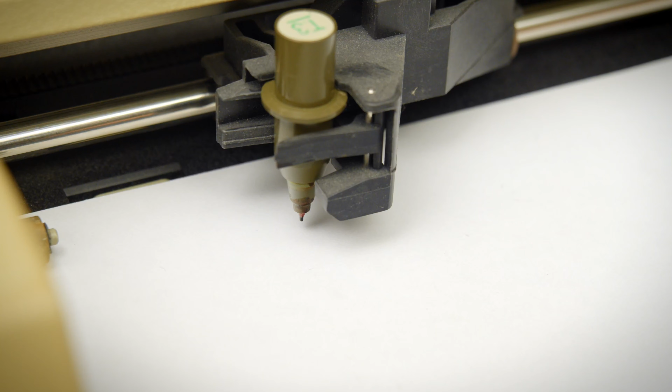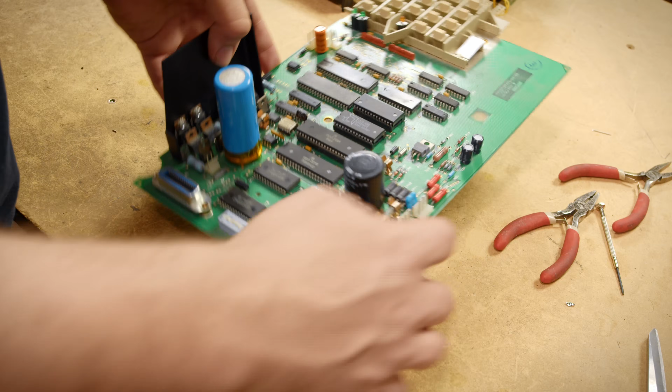The HP 7475A plotter. This is a pen plotter. It takes vector data from a computer and draws it onto a sheet of paper. The 7475 brought nothing new to the market when it was released, but what it did bring made it such a dominant force in its segment that it was the gold standard up until the end, and somewhat still now. Today, we're going to take a look at the history and impact, restoration, and the usage of the plotter that set the course for its industry, much like how the Epson MX80 and IBM PC also did.

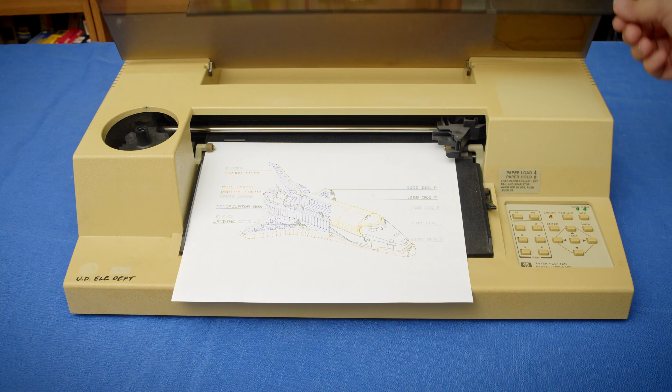There really wasn't any one novel feature of the 7475A that made it so good. Its biggest selling point was holding 6 pens instead of 4, but there were plotters before it that could hold 8. Speed was always an improving metric, but it wasn't any faster than HP's own models released 6 years before it. The same can be said for its resolution as well, which was limited by its control language rather than its mechanical capabilities. But that language was actually one of the biggest aspects that made it have such a huge impact. This plotter uses HPGL, the simply named Hewlett-Packard graphics language.

HPGL was first shipped with the HP 9872 in 1977. Here I have the 7221 sister product, which was nearly mechanically identical but did not use HPGL. But this is actually an interesting comparison. I've been struggling to find understandable documentation on how to program for this plotter due to its compact BCD interface protocol. HPGL, on the other hand, uses ASCII command lines with simple 2-letter statements to communicate. It's nearly instantly obvious how to use the plotter when looking at these commands.

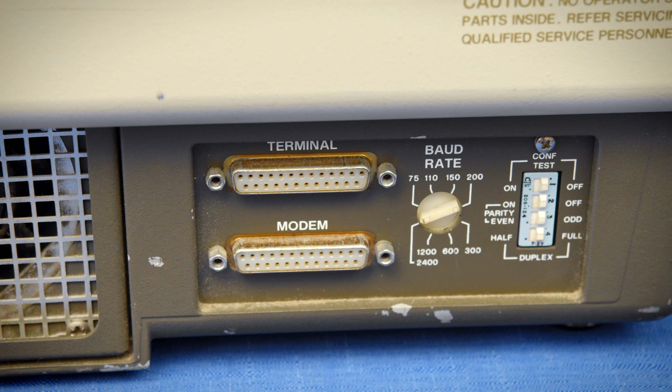However, the 9872 plotter was relegated to usage with mostly HP computers because it used an HPIB interface. The 7221 here is the serial model, but without HPGL support, due to wanting to avoid the verbosity of plain ASCII commands over a potentially expensive time-shared mainframe connection.

This was one of the things addressed by the HP 7470 in 1982, a plotter I've already taken a look at in its own video. It was available with HPGL and a serial model was made. HP was directly going after the IBM PC market with this plotter, trying to appeal to a broader audience. This was coupled with HP aggressively pushing software developers to add support for HPGL to their products. As you could surmise based on the name, there was no universal plotter interface standard, and each manufacturer was creating their own graphics interface protocols.

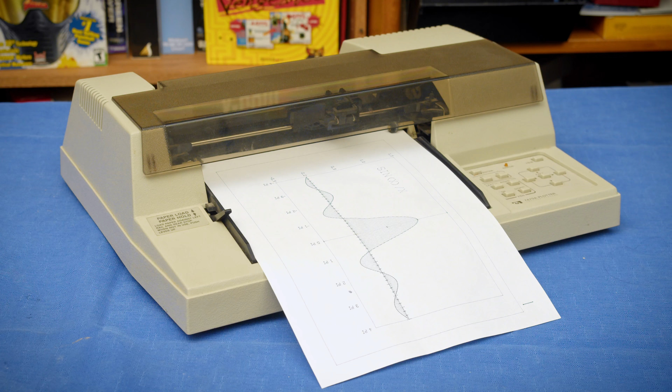The 7470 brought more than just a language gaining manufacturer support though. It simplified the design of the hardware significantly and made it much easier to use. Stationary electrostatic beds like on the previous plotter were replaced with a single pen axis and rollers that grip the paper to move it in the other. This reduced the overall size and weight of the machine due to much simpler mechanics.

The 7470 was only a 2-pen plotter, though it was half the cost of the previous 4-pen $4,200 plotter, coming in at $1,795 at introduction, and this would drop quickly. But for plotters, more pens is always better.

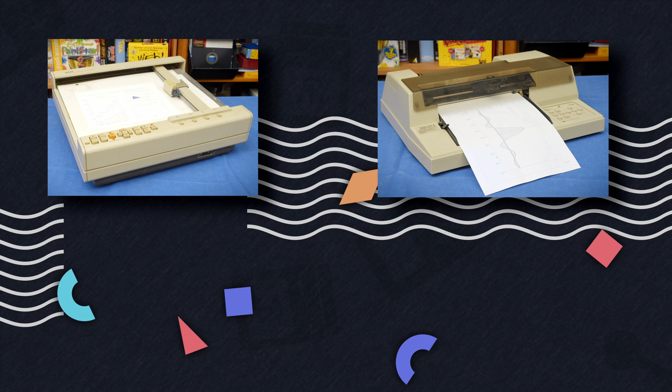Finally, the HP 7475 enters the scene in 1983. It brings with it the now well-supported HPGL interface of the 9872, the simpler mechanics of the 7470A, and adds a 6-pen carousel to bring it up to par with the bigger of its rivals. It also added support for both A and B-sized pages by rotating the bed layout and extending one of the rollers inwards more.

All this for $1,895, with the 7470 also being discounted permanently to $1,095. The 7475 was reviewed well at launch, but it didn't have much to stand out with and was just perceived as an all-around solid device.

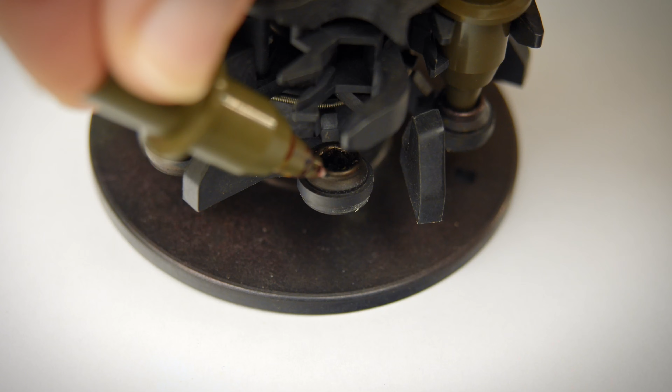One feature of all 3 HP models reviewers still enjoyed was the plotter's design to seal the tips of pens when being stored in the plotter to prevent them from drying out. Elsewise, you would have to remove all of them after every session just to put their caps back on.

The 7475A sold well and was never actually replaced with another model. The 7470 was eventually replaced by the Color Pro, which gave it 8 pens, but did not add wide format paper support. This meant new software continued supporting the 7475 for years, and this is where it gets really interesting, because manufacturers of other plotters decided to take advantage of this and started providing HP emulation with their models, allowing them to use software with HPGL support for the 7475.

Even non-vector devices like this AST laser printer would support HPGL, which as a raster device would have to handle it completely differently.

HPGL became the de facto standard plotter interface protocol, and many implementations were specifically aimed at the 7475 since it brought so many common features together in one place. This support even continues today. Inkscape and KiCad are just two examples of programs that can still natively output HPGL as plain text files to be sent to plotters.

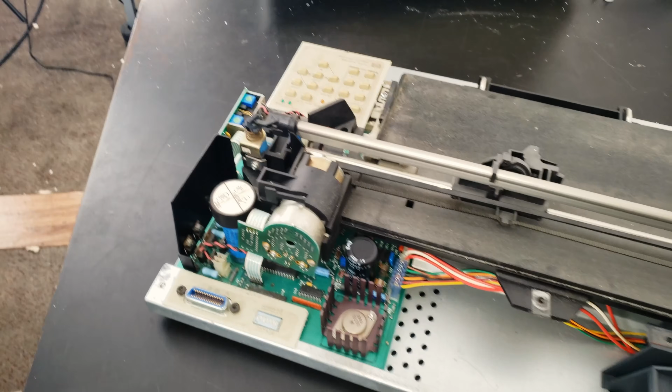This makes using it today still entirely possible with modern computers. But, being 40 years old, you're nearly guaranteed to run into some issues. I was sent my 7475 plotter in a big lot of HP hardware from James in Indiana. Being unfamiliar with the device, I decided it would be prudent to open it up before powering on to inspect, and I'm quite glad I did. The very large power filter cap in it was leaking badly. Thankfully, it had not corroded anything though.

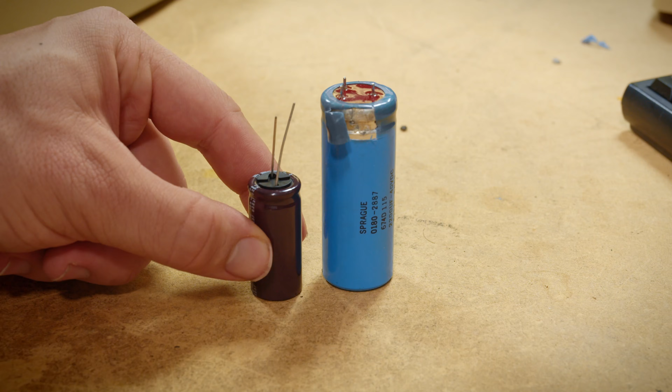Oddly, after I removed it, I found it had been seeping back up the jacket and crystallizing, which was a new failure mode to me. This cap obviously needed replaced, so I went ahead and spec'd out a near full cap replacement set on CapsWiki. I decided not to replace the small axial ones because they looked fine and new ones were outrageously expensive.

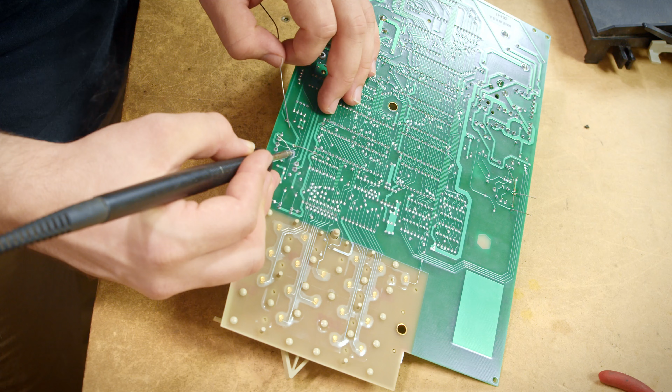The recap was mostly typical, except for the fact that the giant leaking cap technically doubled as a mechanical support. It has a socket with foam padding on top that supports the pen rail piece. It may not have been needed, but I thought this would be a fun time to try restuffing a capacitor with a smaller modern one. It was not easy, and I almost tore the case apart, but I was able to do it.

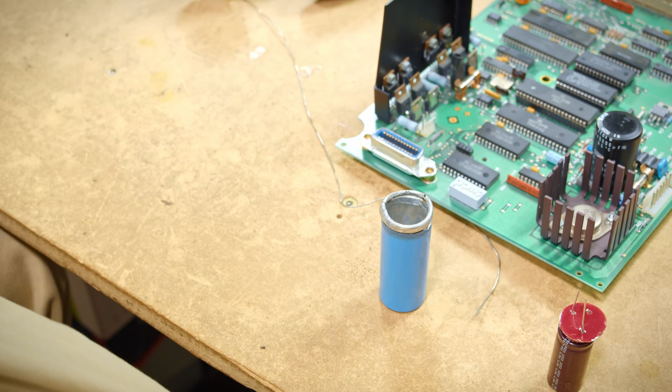I got it back into place in the end. Again, this probably isn't needed, but I was trying to keep it as stock as I could and didn't know how removing it would affect it. After I knew it wouldn't catch fire, I was free to turn it on for the first time and was pleased to have it work flawlessly.

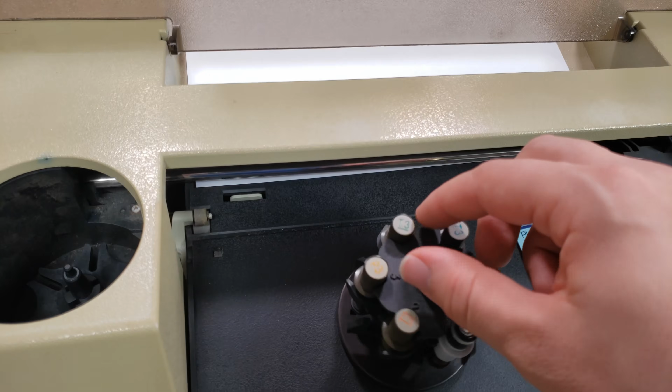I was alarmed by the brutish method it uses to find the first pen in the carousel, which is done by slamming a peg up against a stop and checking the motor current, but it was working. Now that it was known to function, I started working on some better demonstration software on my new favorite HP system. But when I got to the point of testing it, that peg had sheared off of the pen selector gear. It turns out it's a softer plastic part, which makes this even less surprising.

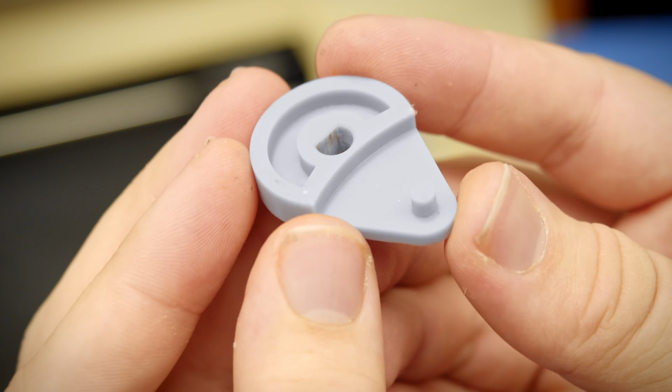But I knew it was bound to happen anyway because Curious Marc, who also plays with copious amounts of HP hardware, had the same thing happen. He got some help with a replacement part for the gear with 3D printing and has posted the model online. So I did the same as him and printed a new part to put in. With that one in now, it's finally working perfectly and we can begin to test it.

I've got a few different ways to do that I want to check out. So let's see what using one of these is like.

Now, to demonstrate my 7475 here, I've connected it to my IBM 5160, and I've got a program called KeyCAD Complete that we're going to run on here, and this is a compatible program. Now, I thought this would be cool because this would be a much more representative way that most people probably would have used one of these. They would have got some software that supported the plotter and then used it with their PC.

Unfortunately, I can't really easily do that, and the software is the letdown, but we'll get to that in a moment. We will demonstrate this thing in another way in a bit, but I just want to go over this really quick. So first, let's talk about setting up the plotter so that we can use it.

Now, I want to start off with a simple demo to begin. So I'm going to take one of my pens and put it into the carousel here. Then I can just drop that back down in, turn the plotter on, and it's ready to go. Now, it will have to home when I tell it to pick up the first pen, which is going to have it slam that peg into the rubber stopper again.

Always horrifying, but now it's ready to plot. So I can take a sheet of paper here, slide this in, and drop it down. Minor note here, there is a paper stop back there that raises and lowers with the paper latch.

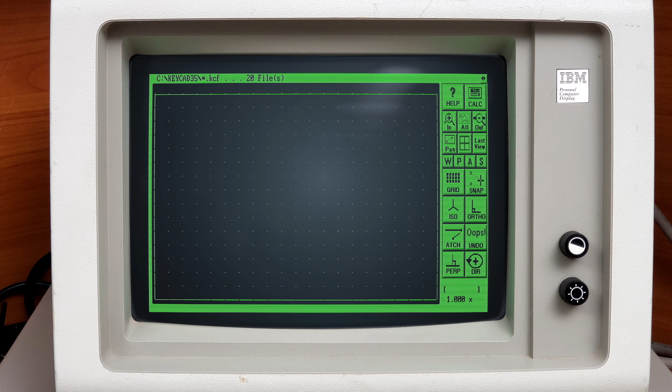And there we are, the Batcar prototype, designed with KeyCAD 3.5. This is what you get out of the CAD software. It's kind of cool — I haven't actually tried designing anything with it yet, but it's clearly functional.

So let's go ahead and try plotting this. I'm going to press F here, and we're going to go ahead and configure our output. So the device is set to an HP 7470 plotter. That's functionally compatible with the 7475 — there's just more pens and a wider paper support. Doesn't necessarily have to use it, so we'll go ahead and select that.

The output is going to be COM1. And I should mention, as I stated, my 7475 is a GPIB plotter, but I'm actually using a National Instruments GPIB to RS-232 adapter. It does work, and it works really well, so that allows me to send HPGL commands over serial, and then they get interpreted by the plotter. Again, there was a serial version of the plotter available, so that's a somewhat expected use case.

I'm going to go to my baud settings. I have configured this to 9600, 8N1 as my settings, and that all looks right. And with that, it should be set up.

File, plot, print. It's saying it's going to be 7.5 by 10 inches. That sounds good to me. So we will go ahead — oh yeah, we got to offset. That doesn't matter.

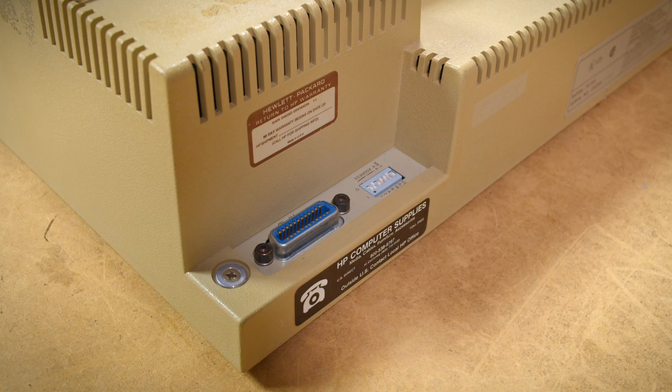So now I'm going to connect it to my HP Series 200, which is the environment that it's really meant for. We're going to run a program on it that I wrote myself. I figured while getting it set up, I'd show you the HPIB port here that mine has. We'll be connecting the pass-through connector on here like that. It's a very weird setup here.

These are the dip switches that control the HPIB address. If you had the serial version of this, these would control your baud rate settings. I have mine currently set to address 5, but for this, I'm going to change it to address 7, for reasons you'll see in a moment.

This is the HP Series 200 setup we'll be using to take a look at this plotter. And this is basically the best computer that you could have used with that plotter at the time. So I'm really excited to be able to demonstrate it this way.

Now, this setup has grown immensely, even since you last saw it. I'm now booted off a hard drive, and there's a couple of other things here, but I just wanted to cover very quickly that I will be using this digitizer, which is a 9111 HP digitizer that actually speaks HPGL itself - that's how it works. There's also the 7470 here. This is where I usually leave it.

That one is the one that is permanently attached to the system at plotter address 5, which is the normal plotter address. So changing the 7475 to address 7 works out better for me because this one's actually address 6. So we'll be using address 7 with the 7475. Doesn't really matter, but you can see how you can have all of these different peripherals connected, and you just have to change the address so that you know where they're at. Kind of like SCSI.

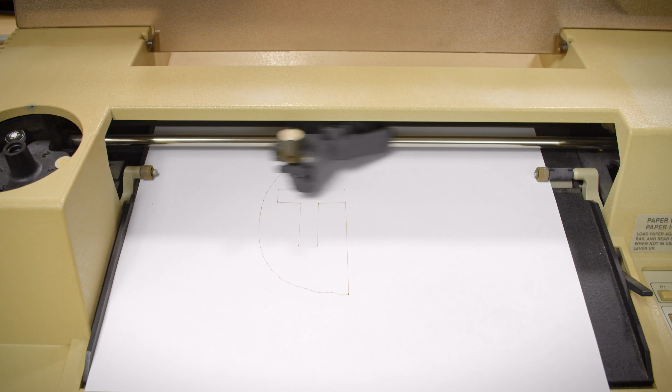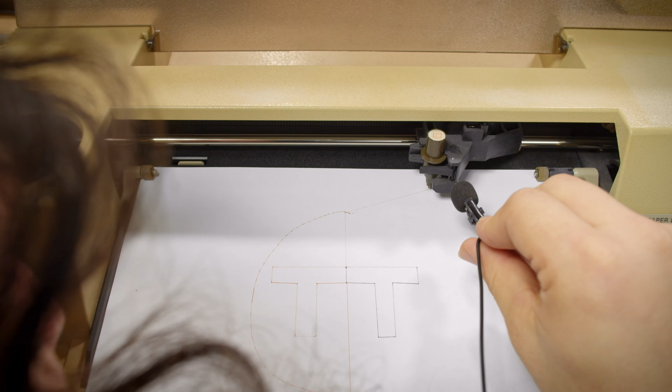Oh, I messed up and left a line on there. Whoops. Also, you can probably hear a slight fault that this thing has. One of the servo motors is buzzing because it's using current to hold the pen in position. It was kind of stuck between a couple of the step points. So that's a thing that this just does every now and then, and one of the reviews I looked at even mentioned that it can be super noisy even when sitting there doing nothing.

So I can totally continue and do more stuff here. You know what's funny is I could actually take this, start down here. Now let's start over here, about right there. Those points that it just put, it will actually store all of those moves. But we'll start down there, and then I'm gonna go ahead and just sign the plot.

Why not? Oh no, I just put a bunch of moves in. Whoops. Okay, let's sign it here. Oh, I forget how you do B's. There we go. All right.

There's my horrible signature. I will say, I think I've noticed trying to do some freehand drawing stuff that this digitizer has some dead points for the pen or something. I'm not 100% sure, maybe it just doesn't do high throughput. But yeah, it gets a little wobbly in some places.

But I can now add that signature to the existing plot, and we're gonna go ahead and do that in black. So let's see it do this.

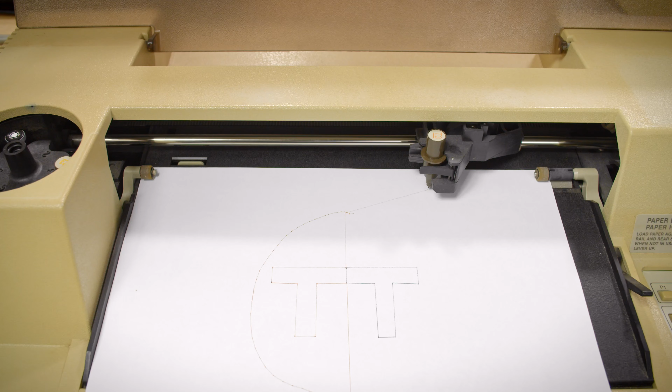And there we are. I have forged my own signature using it.

Oh man, well I am enjoying making progress on my own software here, but there are some much better demonstrations of the plotter if we go ahead and utilize some of the example discs and software that came with this machine. So I'm gonna go ahead and load in one of these. It is a fairly iconic HP plotter image, and we will plot that out on here.

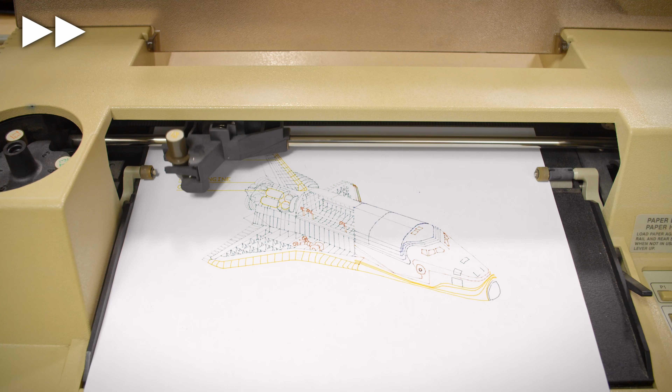Yeah, this thing's pretty darn awesome. Well, that is the 7475 plotter from HP. That thing rocks. I can totally see why it just became the de facto standard and was very hard to usurp. I mean, sure, it could be faster, but you start running into physical limitations of pens then. There's probably only so fast you can go and still get the ink out in time. So I wouldn't be surprised if this thing is about as fast as you want to go already, which means that really, aside from adding more colors you can hold, there's not a lot else to gain from improving upon this. And I'm guessing not many companies could improve upon it, which is why this thing had such a long run.

But that's all I have to say about it. I am going to give you one more plot though. You may have noticed the sticker on top. That actually tells you how to run a demo using the plotter by holding two buttons when you turn it on. So I'm going to go ahead and let the video end with that, running at normal speed, so you can get all the plotter action that you want. But that's it for now.